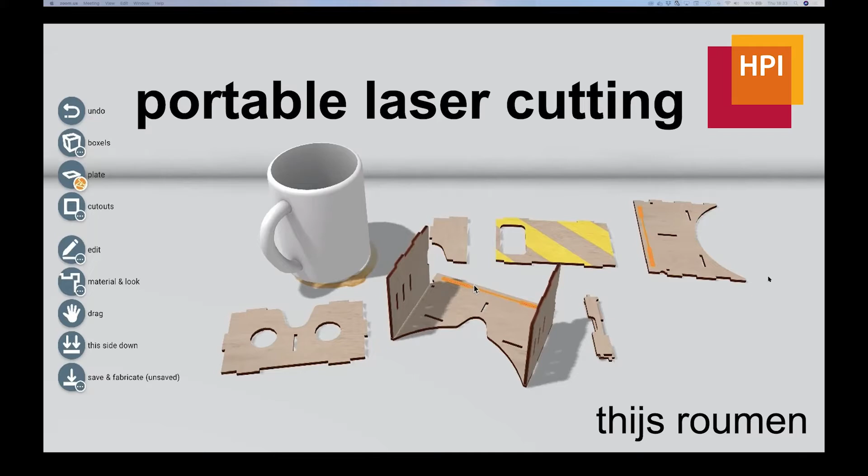So when I started to do research into laser cutting, this is roughly how it would work. You would send a 2D cutting plan to the laser cutter, and then the laser would trace those paths, cut it out, and then you would have the result of what you're trying to fabricate. In this case, that would be a microscope. There are many great things about this format. As you notice, it doesn't make any reference to the specifics of the machine. It's very easy to read. You can encode different processes with different colors. So there are many great things about this.

But today's talk, I'm going to argue why this format will have to go away, will have to die. And I'm going to make another proposal, a different way of approaching laser cutting.

So before we go into more detail on laser cutting and the specifics of that format, let's talk about the field of digital computing, which we are all much more familiar with. You've seen charts like this, where the amount of devices or the amount of users have exploded over time, and you've seen that in different dimensions related to computing. So as a researcher in digital fabrication, I try to look at these trends and see if there's anything I can take from that chart and see how that could possibly apply to digital fabrication.

One thing to note here is that with digital fabrication, we're far behind on that. We're still sort of starting to get up the ramp, and then hopefully there is some future where that exponential will kick in. But in order to get there, there are some pivotal moments that need to happen, that have happened in the history of computing and will have to happen in the future of fabrication.

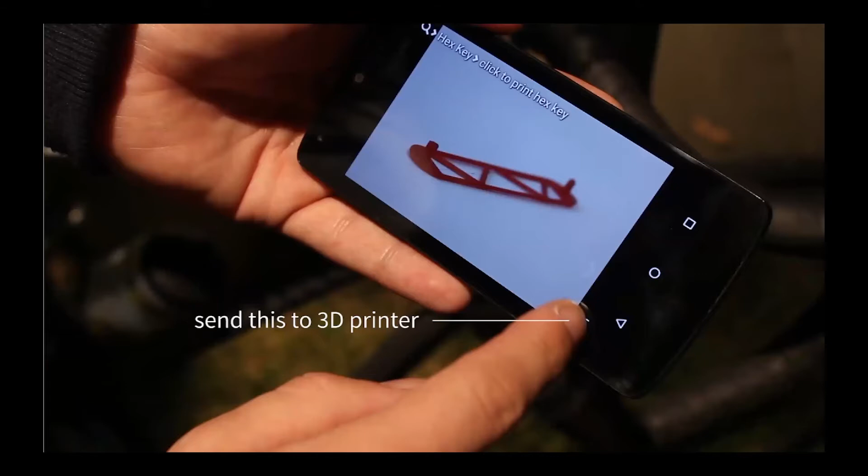So here my bike lamp is broken, and I'm sort of trying to use the kind of placeholder technology that I took with me to solve that particular problem at hand. That would be sort of the envisionment of what that future could look like if we had mobile fabrication devices with us all the time.

But that is a future, like I said, it's a transition where we went from millions of people using fabrication to billions of people using fabrication. That's not exactly where we are yet, right? That would be like four decades down the line. We are still kind of at a point where we are transitioning from thousands of users of digital fabrication to millions of users. That's another pivot that we have to make still.

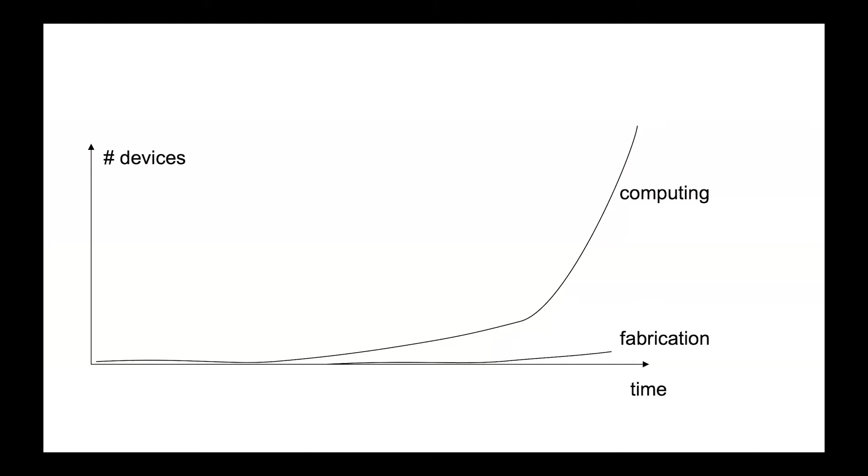And that happened in the history of computing as well. If we look back further in history, there was a pivotal moment where we transitioned from thousands to millions of users. And that is what the research of my PhD has focused on, and that's what the papers I will be presenting today will all kind of make reference to.

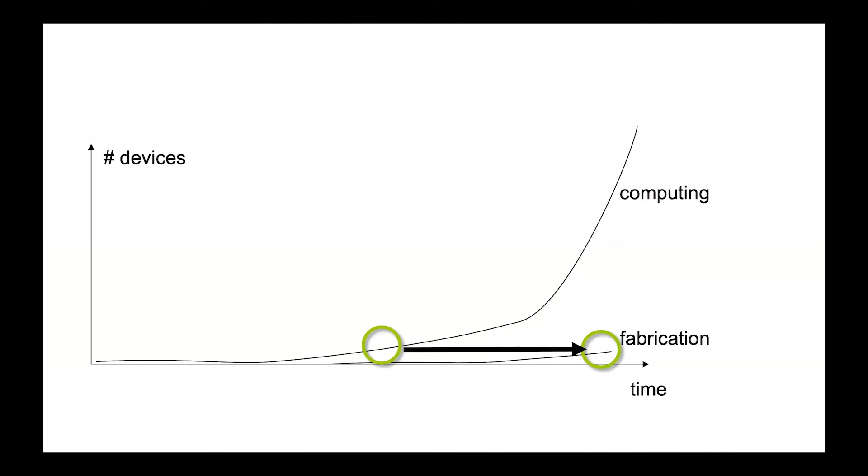So what was that moment? What was that pivotal moment in the history of computing where we went from thousands to millions of users? When I ask that question to students in introduction to programming, I get answers like object orientation or different shifts in programming languages that have happened in their lifetime somehow. But there has been an even more fundamental shift before that, which was the introduction of compilers.

So in the context of computing, we call this portability - the ability of software to be transferred from one machine or system to another. Typically you capture that in the form of a standard, which is an established norm or requirement for a repeatable technical task. So if you put that on a timeline, in the 50s we moved from hardware specific implementations to portable implementations.

And we've seen the same kind of transition happen in all different types of digital content fields. For example, in desktop publishing, the technology was around for a long time, but only since 82, when PostScript was introduced, and later Adobe introduced PDF, was the moment where portability kicked in, and therefore the content produced since that moment is still accessible right now. You've seen the same with digital video, you've seen it with digital audio. Essentially any digital technology that's been around has had this point in time where we start to abstract away from the specifics of the hardware, and then have content that remained relevant up to this moment in time.

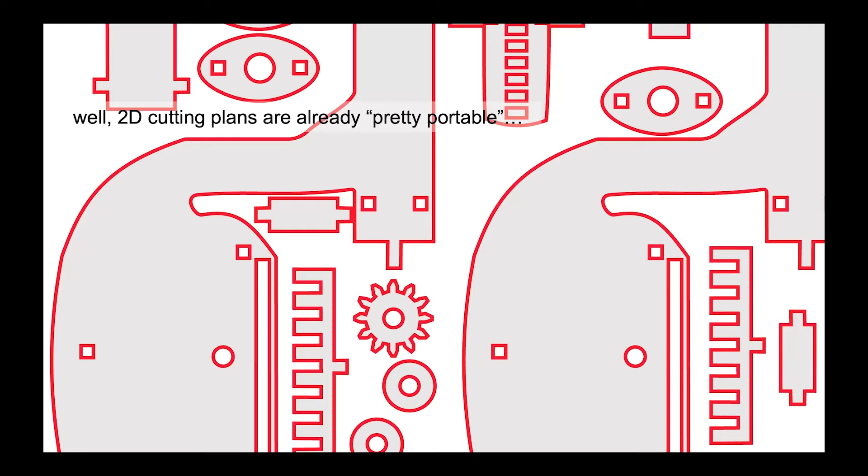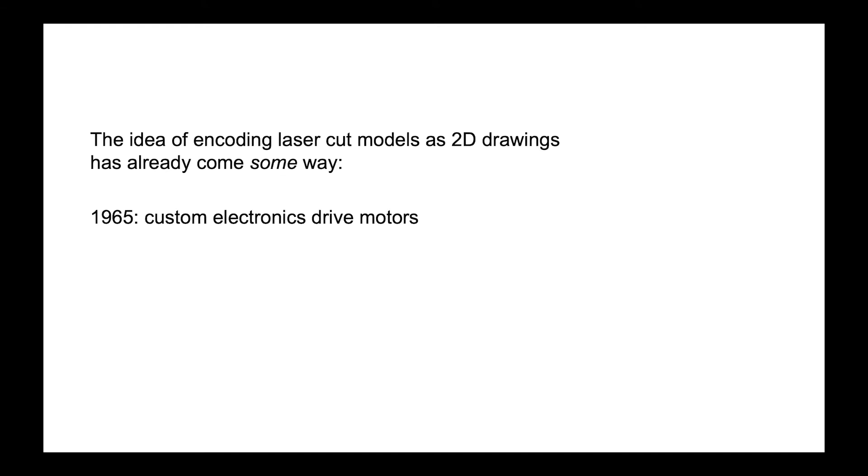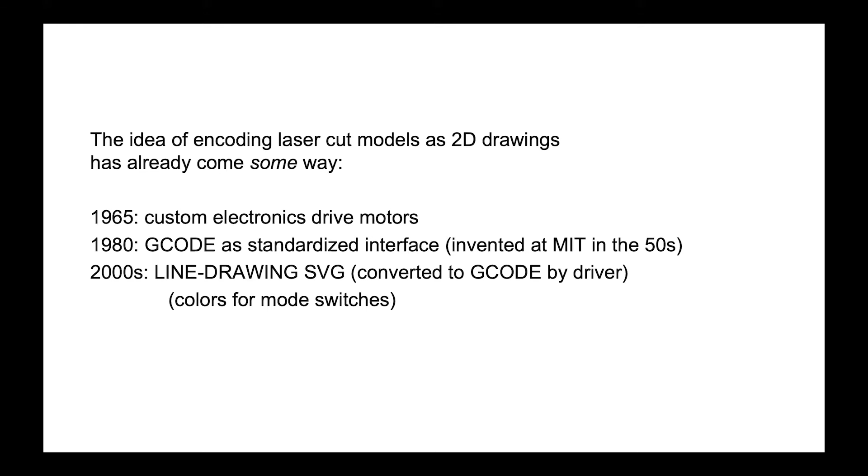So let's look at where we stand with that right now. Because I already showed you this amazing format - these vector files - and to be fair, they are actually already pretty portable if you think about it. They came a long way, because back in the 60s when laser cutting was introduced, people would have to write custom control for the motors driving their laser cutter. Then later in the 80s, the standard of G-code was adopted as an interface to connect with laser cutters - it was already invented in the 50s, but only used as the standard in laser cutting since the 80s. Later in the 2000s, we saw line drawing 2D cutting plans coming up.

So we already managed to go away from the specifics of the hardware, but there are still some fundamental problems in these 2D cutting plans. If I look at this microscope model, there are a lot of different parts that need to connect with one another. For example, this little prong here needs to fit inside this cutout when I want to assemble the model, which is all fine in principle.

But if I have a different laser cutter than the original person who manufactured this thing, it might be that my laser cutter removes more material than the original. And you see that if that happens, the prong here gets smaller and the cutout gets wider, so this thing will not fit together anymore. The same thing happens when the machine removes too little material - the prong gets too big and the cutout gets smaller, so it will probably not even fit together.

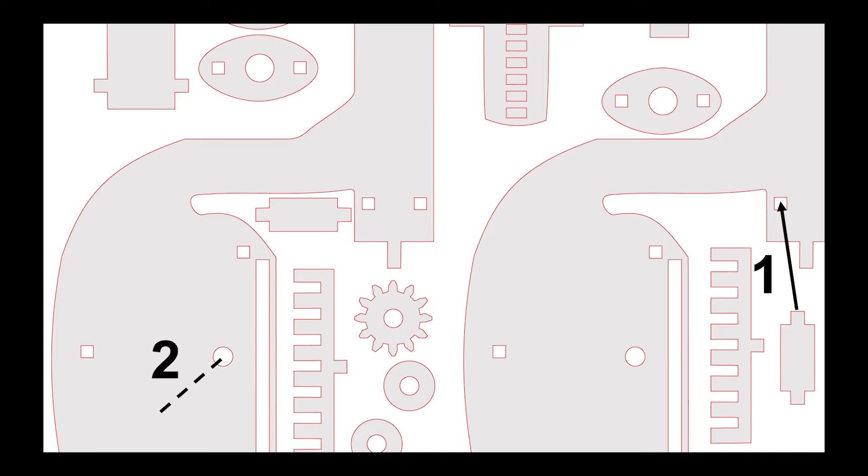And the same thing happens here, for example. Here is an axle that needs to be held in place by a bearing. Again, if the cutout gets bigger, we end up with an axle that ends up wobbling in that bearing, so it will not work. It will jam itself in place at some point.

Just thinking about these two issues would be similar to creating the PDF format for laser cutting - a format that continues to work on any machine. In this case, it would work on any laser cutter.

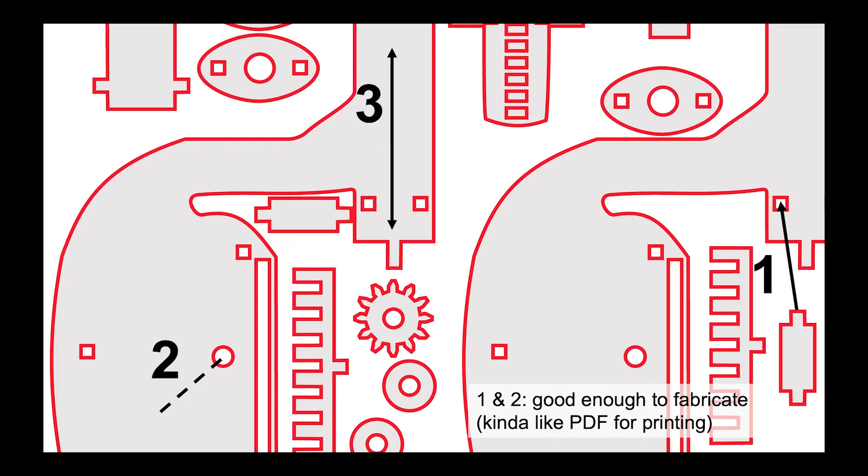But there is something even more nasty here. Like this is a microscope model, as I said before. So if I want to change the dimensions of this model, if I want to make the neck longer of the microscope, we end up with much more complicated transitions. You would have to make a lot of changes in that SVG cutting plan because it's represented in 2D to figure out how to modify that model. That would be, using the metaphor with desktop publishing, the same as having access to the actual source code, if you want to make parametric changes to the model.

So let me just start by investigating these two issues at the bottom here - establishing the PDF for laser cutting. This was my first attempt because I wanted to kind of keep these 2D cutting plans around. There's a lot of great things about them, as I already mentioned. So I was wondering if I can somehow save that format and then make it better so that it continues to work on any laser cutter.

So we wrote a semi-automatic software tool that converts a non-portable SVG file into a portable SVG file. There are two publications related to that in the last two iterations of UIST.

The way this works is it's a TypeScript application that runs in the browser, and it loads an SVG cutting plan directly into that application. Now as a user, you come in and make some modifications to the model. Right now you'll just see this quickly without understanding completely what's going on, but I will show this video again later, and then you'll have the context to figure out what is happening here. The gist is, as a user, I make some edits in that model.

I place some additional cutouts in there. And the great thing is, it's already a 2D cutting plan - it's already an SVG, so I can send it straight away to the laser cutter. There's nothing more I have to do here.

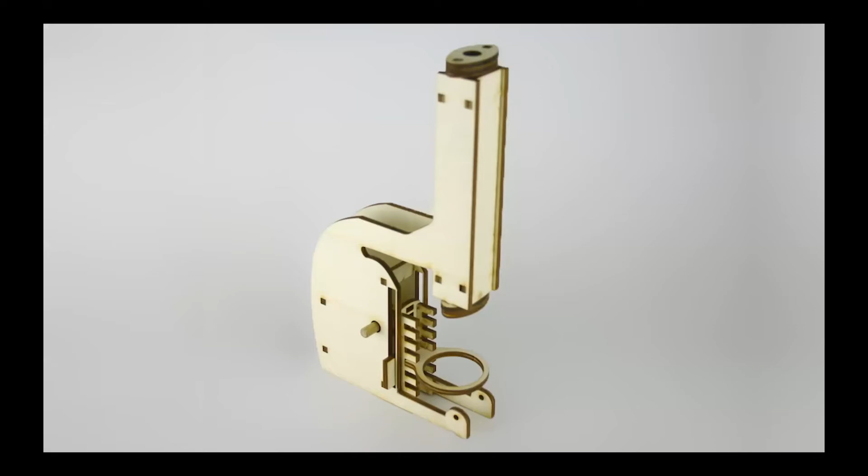So the goal is to take this microscope, which is optimized to work on one particular fabrication machine and in one particular material, and turn it into this microscope, which looks very similar if you look at it at first. But if you look in detail here, I made these joints, I changed them, I made them portable. And I modified this mechanism here - I also made that portable.

So let's look at the joints first. This is what the joint on the side plate of the microscope looks like when we zoom in all the way to that cutout. And you see indeed that the gray zone here is the amount of material that could be removed if your laser cutter removes more material than another one.

These joints that are press fit together really rely on a very high degree of stiffness. So minor changes in kerf make this fail, they make this thing not work out.

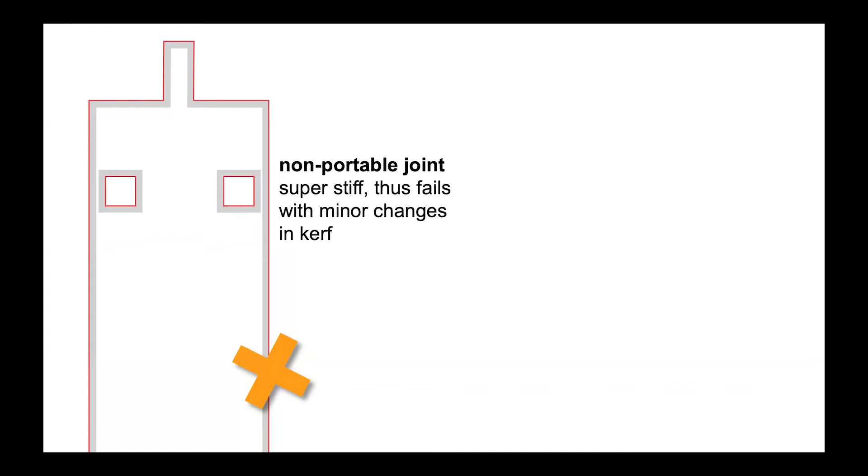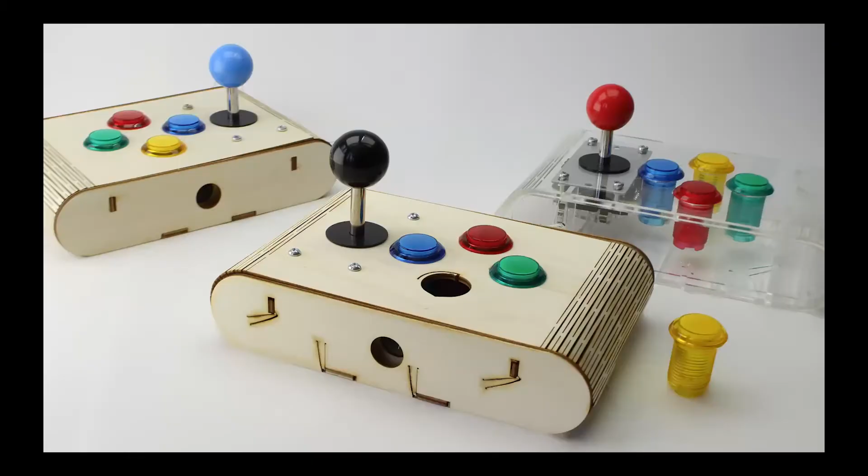So what we do instead is take that joint cutout and add this cantilever spring right next to it. The great thing is now, rather than relying on compression of the material, we rely on bending of the material. So there's a larger tolerance for which this joint continues to work.

We use that approach to convert all the joints and mounts in the different models into kerf-independent joints and mounts. Here you see some finger joints, and also the hole that has to hold this button in place. They're all turned into cantilever-based versions of the same mechanisms. The same model now continues to work not only in plywood, but also, for example, here in acrylic.

So we call this software tool SpringFit. It's a software tool that detects joints and mounts in models and replaces them with portable equivalents that are tolerant to variations in kerf. But it's not quite the complete story.

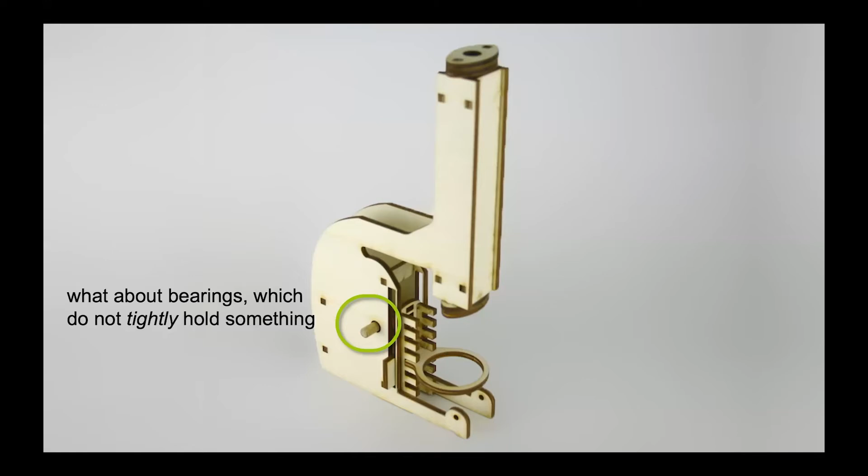Remember, I showed you this microscope, and there was also this mechanism there, this bearing. The thing with the bearing is that you want to hold that axle in place, but you don't really want to put a spring right next to that, because if you were to do that, you would introduce friction into the mechanism, which is the opposite of why you want to use a bearing in the first place.

So I was wondering if I can again save the day by modifying that bearing in a way so that it continues to work even if the kerf or the material changes. We achieved that by placing this additional inset right next to the bearing. Zooming into that, it's some sort of crescent-shaped inset that we just jam next to the axle. And that actually turns out to work and continues to hold that bearing in place even if the kerf changes.

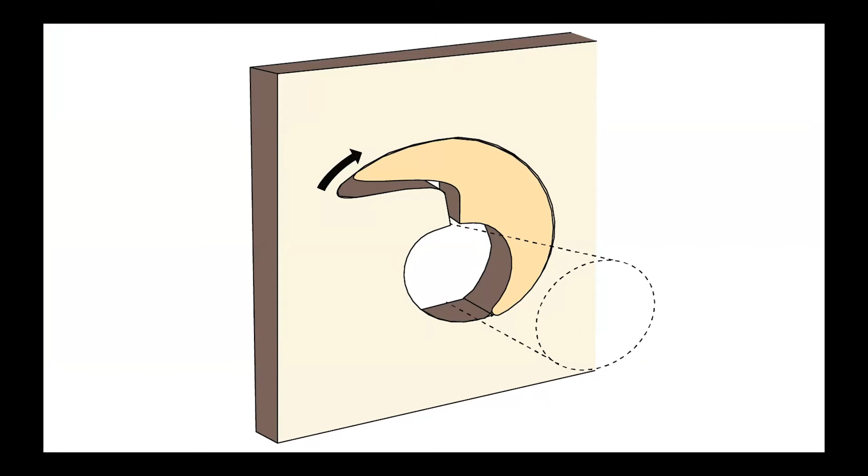Let's see how that works. Here is the bearing which has to hold the axle in place. As I increase the amount of kerf in the mechanism, you see that the inset changes in shape a little bit, but we constantly jam it further in. If you've paid attention, you see that at all times the inset closes the gap exactly.

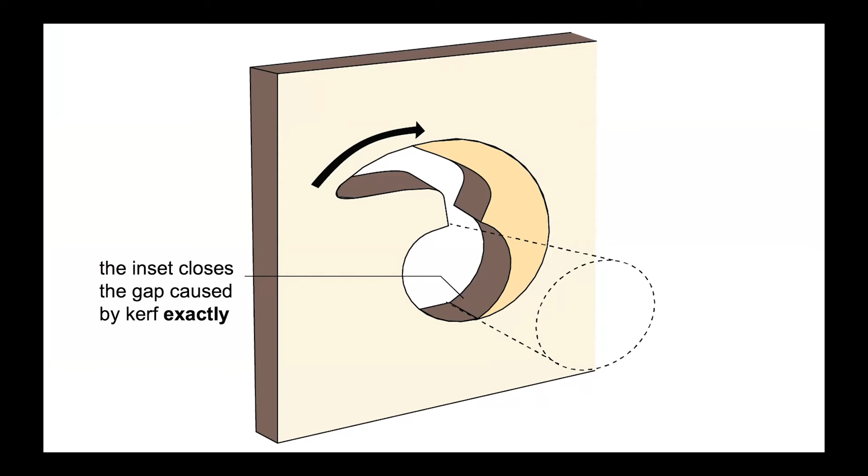So the gap that is caused by kerf is always closed, and the bearing is always holding that axle in place. All the user needed to do here is just jam the inset in place. It doesn't need to understand how kerf works or how materials work or any of those. You just take the inset, you jam it in the cutout, and then you're good to go.

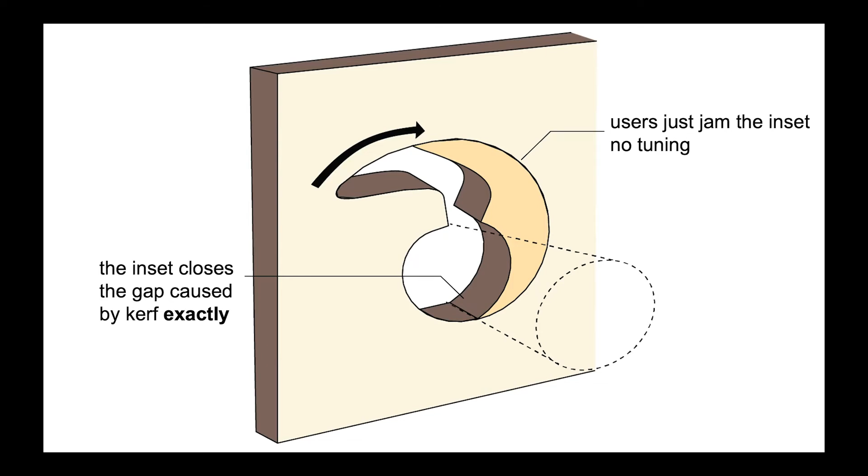Let's look from a more technical perspective at what's going on here. The inset consists of two key elements: the outside curvature, which we refer to as a jammer, and the inside curvature, which we refer to as an inverse scaler. If you look at the jammer in isolation, it has the shape of a self-similar Nautilus spiral.

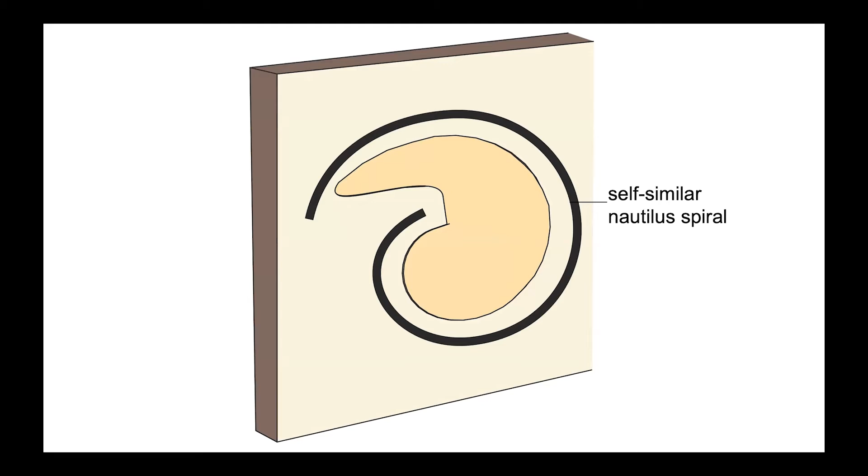The great thing about this geometry is that if we apply kerf to that inset, it gets smaller, which makes sense, but the curvature doesn't change on the outside. So there's also always going to be a moment, if we rotate it in place, where it's going to jam inside its own cutout, and then it holds itself in place really well.

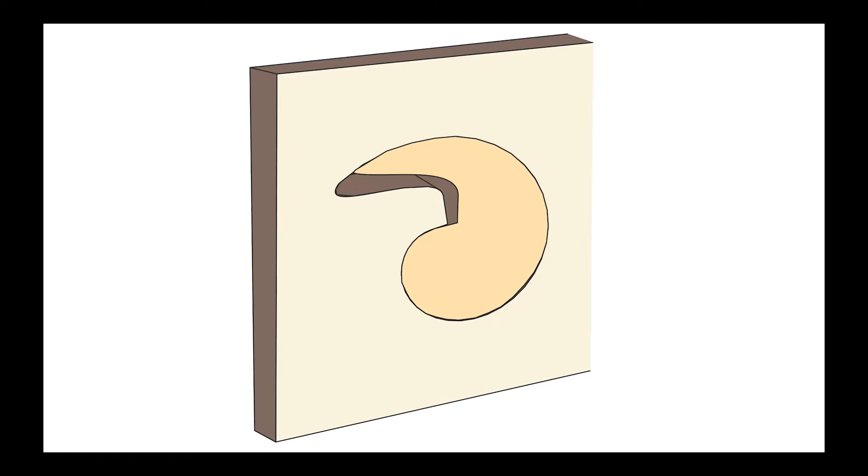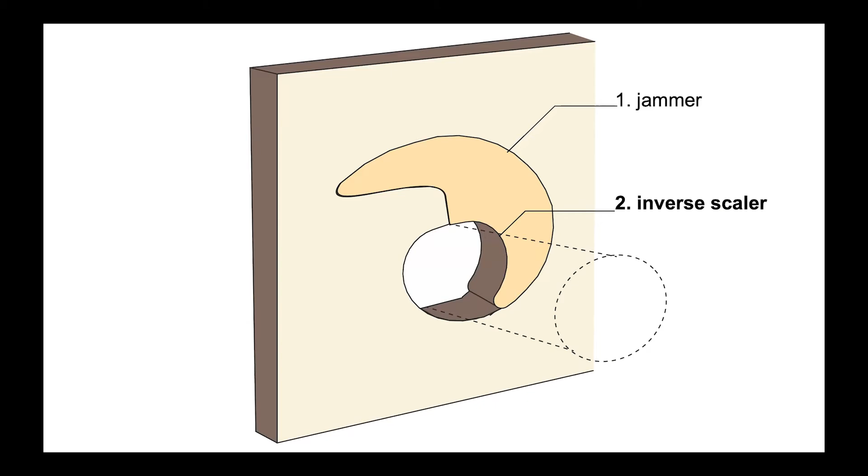So the jammer holds that inset in place, and in turn the inverse scaler now has to hold the axle in place. The way this works is again based on the same philosophy. The inverse scaler is derived from a similar spiral, but now it's flipped. So as more kerf results in more rotation of the inset, the cutout gets actually smaller by exactly the same amount, it gets compensated for again.

And that results in bearings that are of constant size. If you look here, we've simulated the amount of kerf in different bearings, and you see that even though the kerf goes up, the bearing is constantly holding the axle reliably in place, even if you would mill the same cutout.

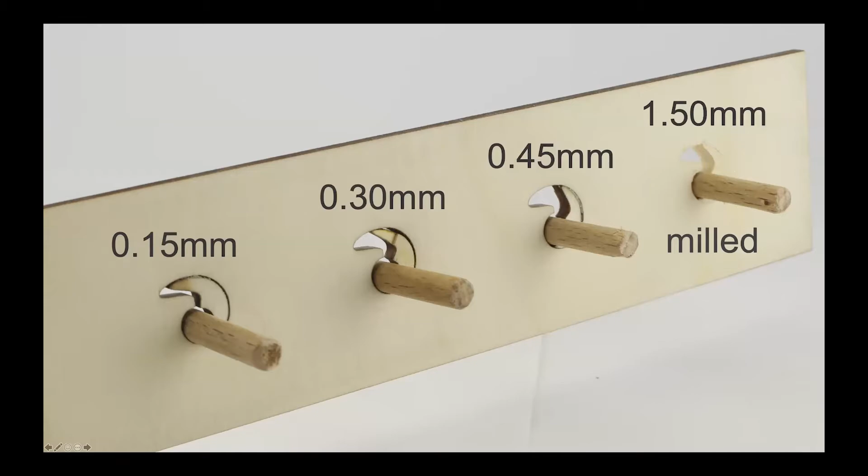So for that reason, we call these mechanisms kerf canceling mechanisms. They are mechanisms that continue to perform their functionality independent of the amount of material that's removed by the fabrication machine, which is known as kerf.

So if we now look back at the initial walkthrough of the editor, you have some sense of what's going on. We loaded that microscope cutting plan here. Ahead of time, KerfCanceler tried to guess what possible mechanisms are in there, but it cannot get everything right. For example, there is a sliding mechanism here, and in the 2D cutting plan, that's represented by a simple rectangle, so there's no way for KerfCanceler to know that this thing has to be a sliding mechanism.

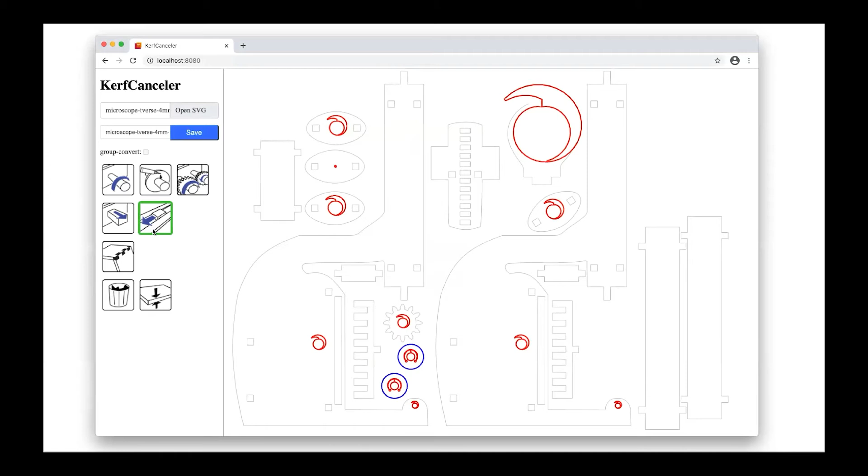So this is where the user comes in and annotates these cutting plans with additional information. Here we place a sliding mechanism on top of that rectangular cutout that we found. We tell it where the gears are, because again, the gears are not encoded in the 2D cutting plan.

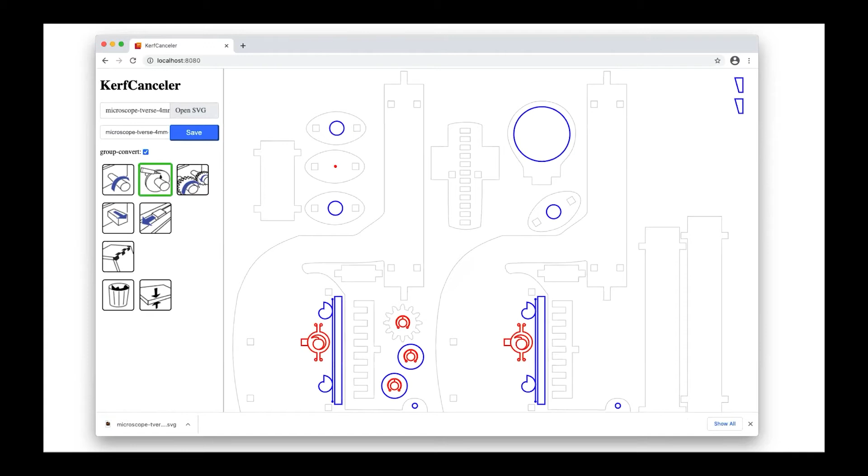And then when everything is done, you just save the file, and as I said before, you send it to the laser cutter right away. You can now send it to any laser cutter. So this microscope continues to work irrespective of variations of kerf or material, even if you would fabricate it on, for example, a milling machine, so another subtractive fabrication technology.

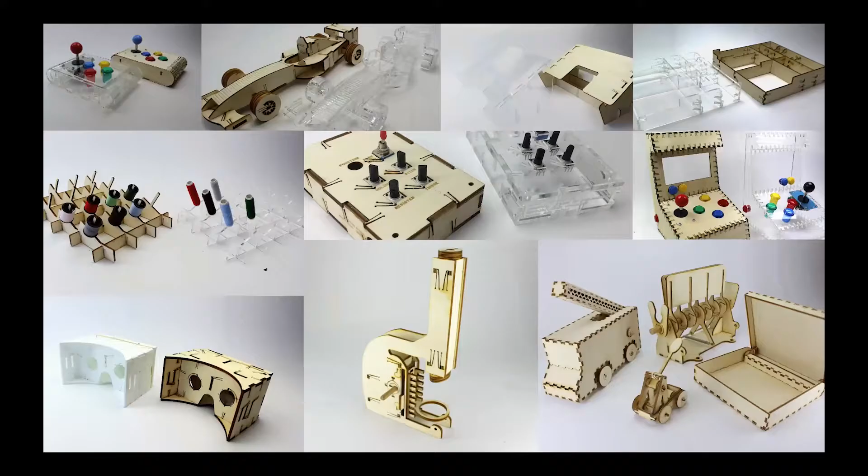And so we use that software to convert a whole range of objects that we found in online repositories to kerf-independent things, and we now fabricate on any laser cutter and in a range of materials.

All right, so how far did we get so far? Like I promised you portability, and I think with the approach that I've shown you so far, we've essentially achieved portability, because these models will fabricate on any laser cutter. They work on a range of materials. In many ways, this is the same as a PDF, which you can just open on any device and it reliably works.

But I don't know about you, but if I look at some of these models, we did something that came at a cost, it didn't come for free. The cost here is that if you have a lot of joints, like for example these finger joints that are lined up with each other, it has some sort of aesthetic quality to it. You may or may not like it, but it certainly also has a structural quality to it, right? It decreases the structural integrity of the overall model.

And that is fine for most laser cut models, because they tend to be very, very sturdy in the first place. They are excessively sturdy because the material is just very rigid by itself. But it's a trade-off that you need to make. If you really want to optimize your model, this may not be the best way of solving it.

But more importantly, I made a bigger promise at the beginning, right? I said I want to be able to modify that microscope. So if you look at the microscope again, the 2D cutting plan here, if I want to change the length of this neck, that actually got even harder because I added additional cutouts in the cutting plan now. So let's see if there's a different approach, a different route without necessarily saving the 2D cutting plans. There's another way of solving this problem.

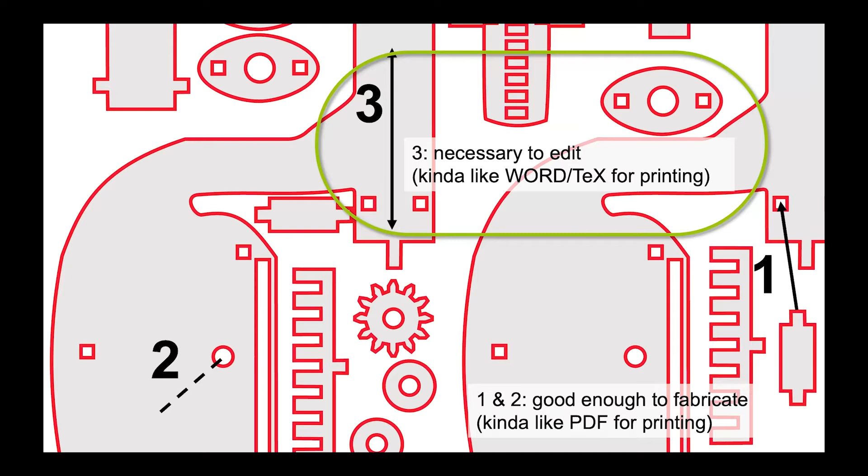So in 3D, this would be a different problem. Here's an example of a VR headset. I don't know if you've seen Google Cardboard or other kinds of VR headsets lately - you put your phone in the front and you look through a bunch of lenses, and that gives you a reasonable VR experience because there's a divider between your eyes, so your left eye gets different content from the right eye, displayed on your phone. It's a very cheap way to very quickly have a reasonable VR experience. But the model that you see here is not a particularly inclusive model if you think about it.

It's like if I talk about millions of people using fabrication, this model is made for one particular user, right? It's one specific shape of your forehead, one interocular distance between your eyes, and one prescription, for example. I would probably want to modify that model in order to make it work for me.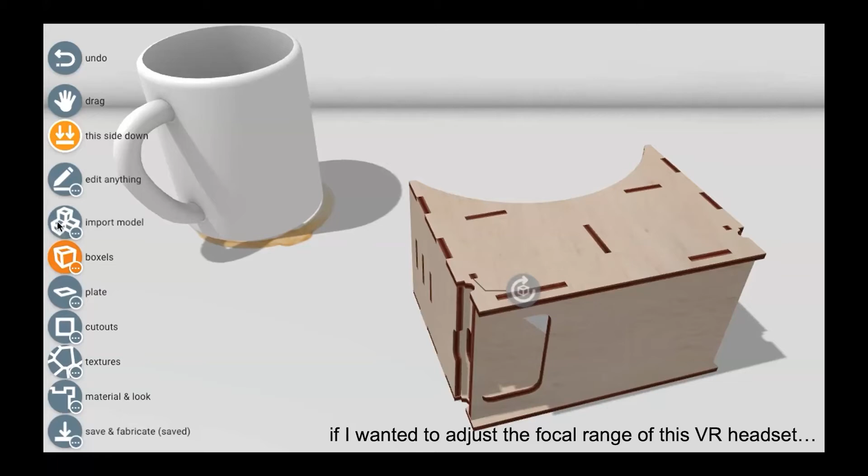What I would want to do is stretch the front of that VR headset further away so that it will fit my prescription. And in 3D, you would do it like this: you would take a stretching tool, take the model, and just stretch the front plate forwards. Now I could adjust it to my prescription, and I'd be able to fabricate it and have a meaningful model.

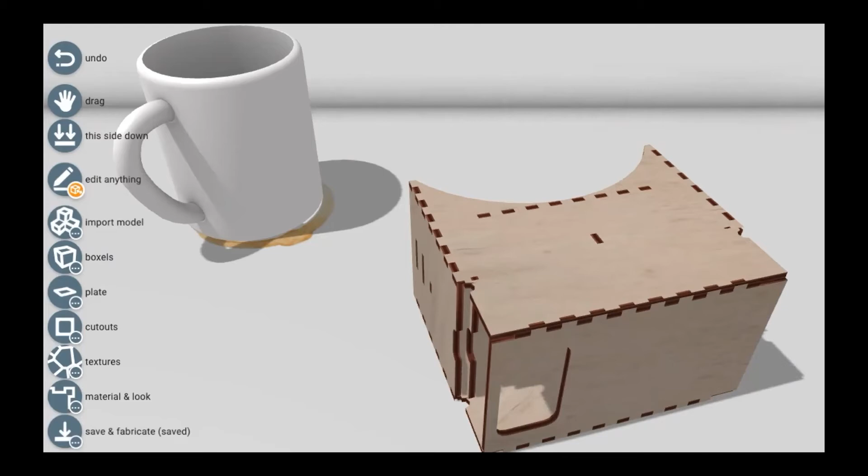But this is not how I find that model in the first place. If I go to an online repository, this is what I end up finding: a 2D cutting plan, as we've been discussing so far. And so it works a little different here.

If I want to make that same transition, if I want to again stretch that front plate forwards of the VR headset, I would logically modify that plate that sits on top of the VR headset. But when I modify this, I'll have to make sure that all the plates that connect to it are also modified accordingly. So I'd have to modify this side plate here too, because otherwise you'd skew the model instead of stretching it straight forwards.

And I'm going to need your help here. I don't know if you can use a virtual hand or a checkbox or something to indicate what I need to change in order to solve this problem. So I would like you to vote if you think these have to change. Would these parts in the model have to change? Just raise your hand or virtual hand if you think so.

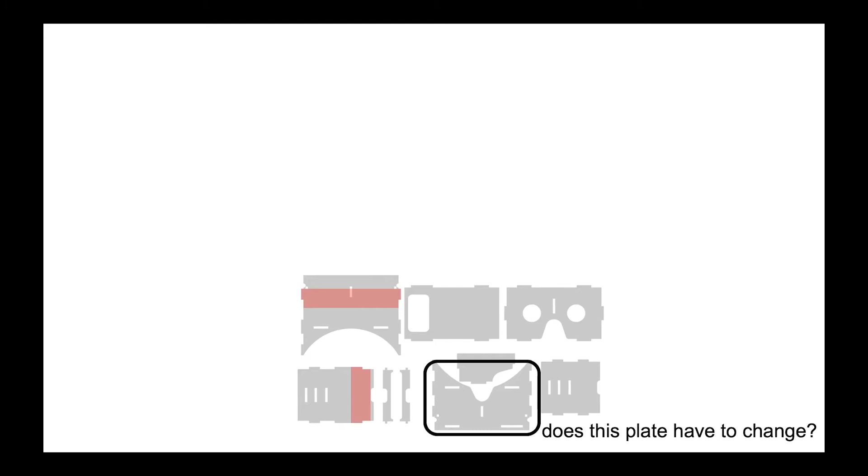What about this plate here? Would that have to change? Maybe - I think I would change this plate because this is sort of the opposite of that top plate, the plate on the bottom. So if I stretch only the top plate, I would skew the model forwards. By stretching both at the same time, I would actually be able to go straight.

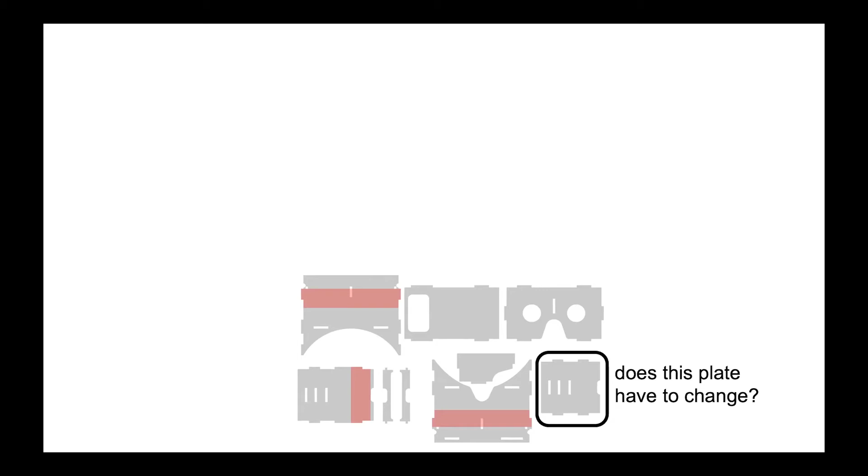What about this plate here? I think that has to change. I think so too - if you didn't modify this plate, you'd sort of warp the model instead of stretching it forward. So you want to make the same transition here too, stretch it longer.

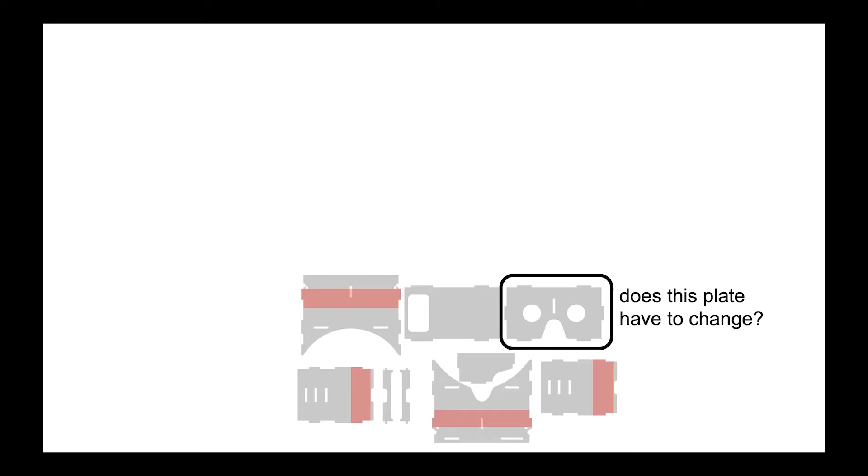This plate - how about this one here? So I would agree, I would also not modify this one. This one actually turned out to be very interesting. We had expected that we would not have to change it because it doesn't connect to the other plates that I've been stretching here.

But it turns out that it's the divider between your eyes. If you don't make that longer at that point, the left eye will see the content of the right eye and the other way around. So for the optimal VR experience, you actually want to modify this one too. But the main gist is that in order to find out what you need to change, there turns out to be some ambiguity - some discussion already, even within our lab, we had discussion about this.

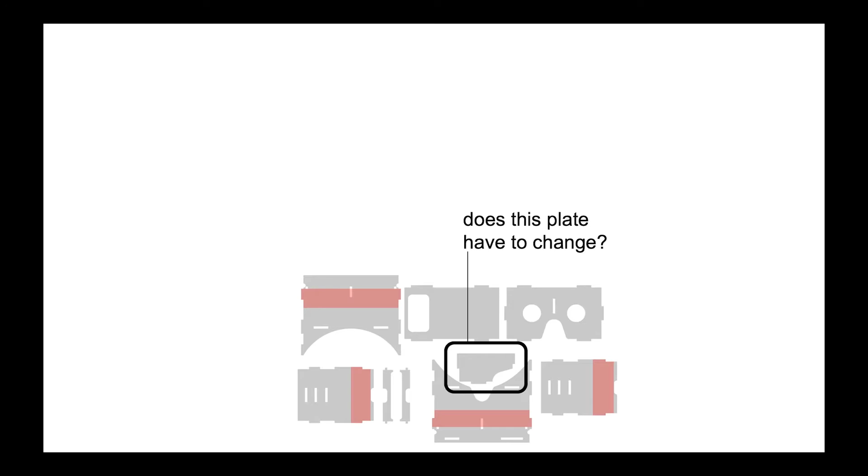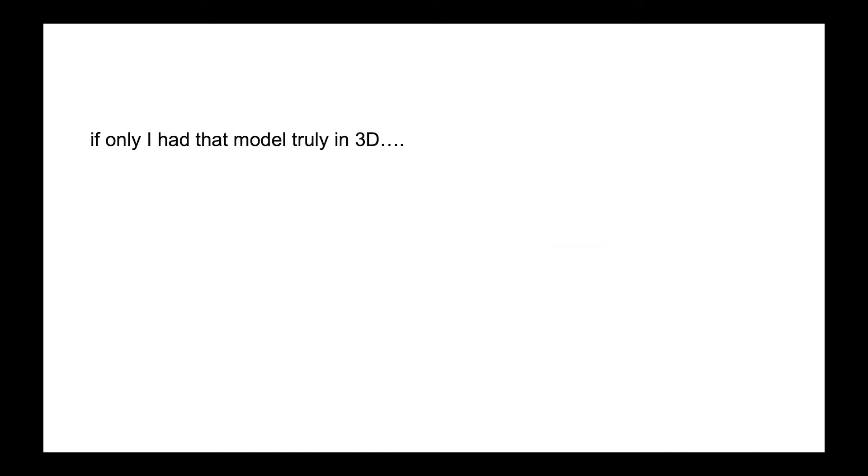The main thing is, in order to come to this conclusion, what you end up doing, I think, is you imagine what the 3D model looks like of these plates, what the transition looks like in 3D, and then you execute that back to the 2D cutting plan to figure out which plates to modify. So I can't help but wonder what it would be like if we truly had this model in 3D in the first place. While I was doing the research I presented so far, at the lab we started a bigger project called kyub, where we build a 3D modeling environment for laser cutting.

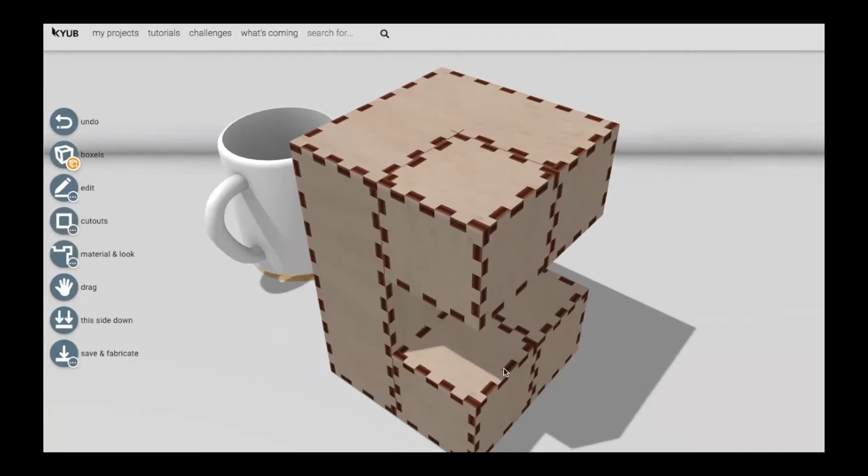So here's a bit of a preview of how that works. I'm trying to model an espresso machine here for laser cutting, and this is what the kyub editor allows me to do. Very quickly, it lets me stack together a bunch of boxes and build the shape of that espresso machine. Then with additional tools, I can fine tune that geometry and get away from the boxy structure, making it something more interesting, closer to what an espresso machine would really look like.

And of course, we want to put a logo on it because we can. And there you go, right? So in like a couple of minutes, I mean, this was sped up, but still in less than 5 minutes, you would be able to model a complete espresso machine and then fabricate it.

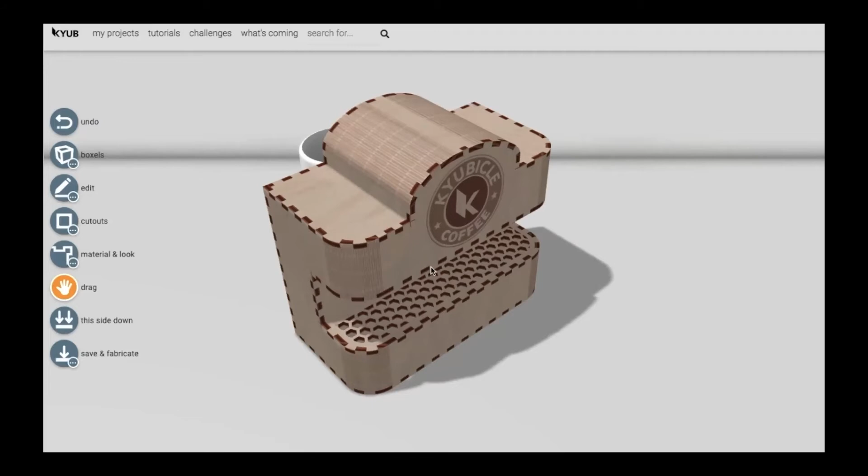And from a portability perspective, this is great in terms of UI, but what's really nice here is that you would now also be able to export it for your particular laser cutter. So you don't need to worry that it works on any laser cutter, you just make sure it works very well for yours, because that's the one you end up fabricating on. You do that by defining the kerf, controlling the parameters that vary when you change the laser cutter.

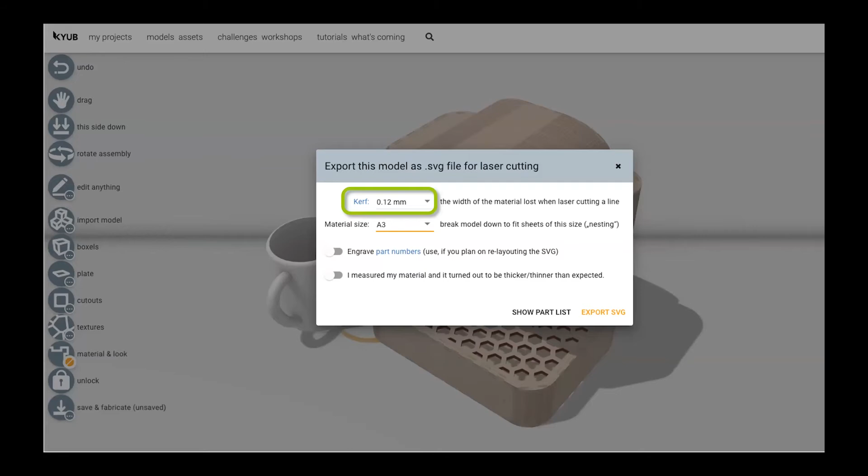And you would then end up with the plates that are exported. In many cases, for most users, you may not know what the kerf of your laser cutter is. You'd be able to indicate that, and then get a kerf strip to measure it with a test cut yourself.

So we have about 500 beta users of kyub, and a large repository of things people have been building. The great thing is all these models are now usable. They are inherently parametric, they can be fabricated on any laser cutter, and you can easily make any modification to it if you want to. And everything is shared, so you can completely start building on the work of others.

So with kyub, in many ways we're done here, right? I've solved both problems here, the issue of not being able to fabricate on a different laser cutter, and the ability to modify the model in the first place.

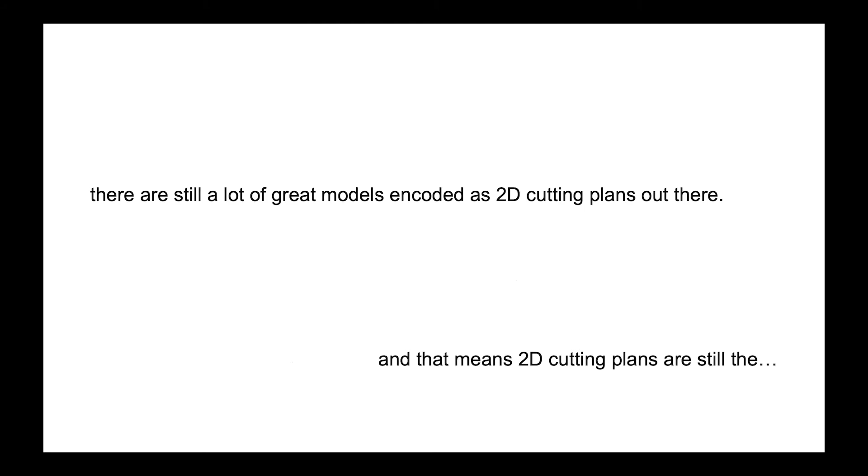But there is a bit of an itch here. There are a lot of great models out there, a lot of engineering knowledge that went into all the models being shared up to now. And that goes for the online sharing community, but even more so for entire companies that built their expertise making these really beautiful 2D cutting plans with a lot of valuable engineering knowledge in there. As long as these 2D cutting plans are around, and people have invested entire careers into making these things work, I think they will remain the standard.

There's just nothing I can do, as a researcher, I can cheer that we all need to start modeling in 3D, but in order to really make a difference, I need to do something more here, I think. Because the problem with standards is, well, they tend to stick.

I don't know if any of you play guitar, but by the time I was born, this is how people shared guitar tabs, an ASCII format. It has all the information in place that you need in principle to be able to play this riff here. But this is something I downloaded just a few months ago, so nothing has changed. It just worked well enough that it continues to stay around, even though there are better ways of doing this. We could come up with way better ways of encoding these guitar riffs if we wanted to. It just doesn't change because it seems to work reasonably well.

And I'm afraid that if that is the case for 2D cutting plans as well, instead of making this transformation to the VR headset, we will just end up doing this: we will still have to imagine what the 3D model looks like, envisioning what the changes in 3D are, and then executing that back to the 2D cutting plan.

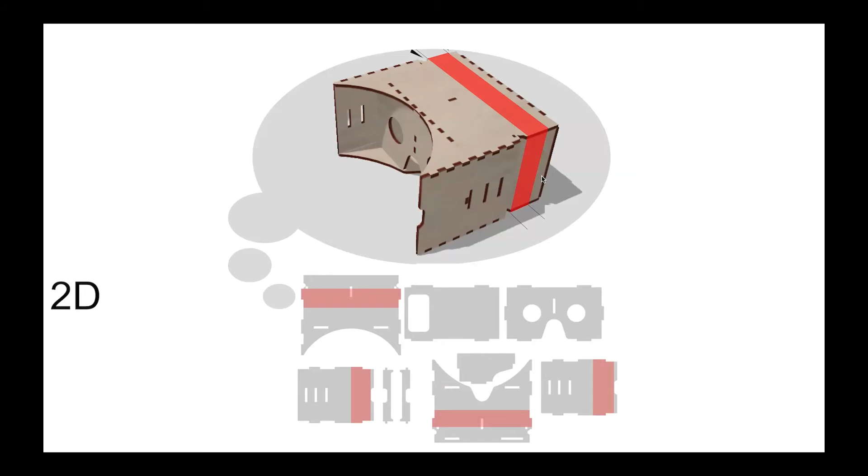So we ran a user study to find out how complicated that really is. It turned out that on average, it took participants 24 minutes to change that VR headset we just looked at together. And 11 out of 13 models failed when we tried to fabricate them, because joints didn't line up, parts didn't connect together well. So not great - it's not something you want everybody to start doing, especially if we talk about millions of users here.

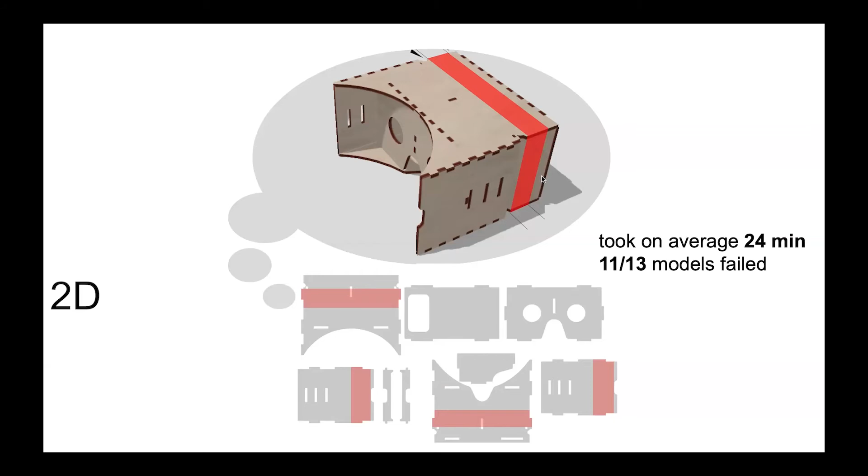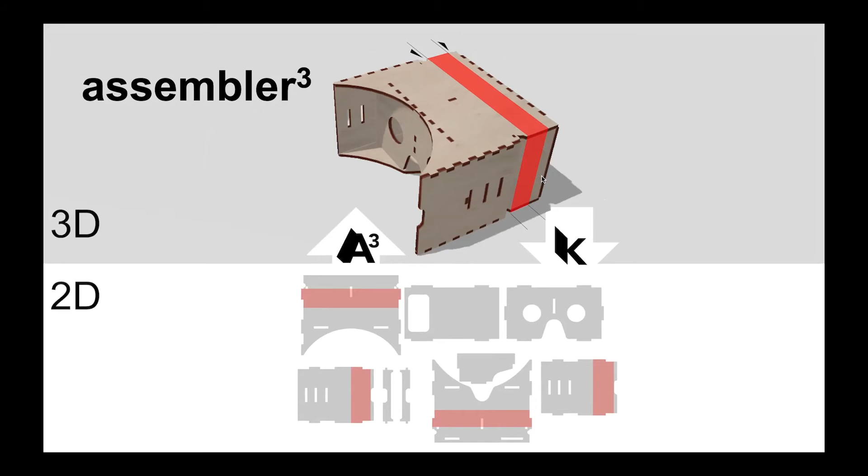So we thought, well, if that's something we have to do, if you have to envision what the 3D model looks like, why don't we make it easy to do that? Why don't we write software that allows you to make that workaround easier somehow? And this is where assembler cubed comes in. There already is software that allows you to go from 3D to 2D, that's kyub, what I showed before. But there's nothing that allows you to go from these 2D cutting plans up to a 3D model. That's where assembler cubed comes in. And even though this feels like an additional workaround, it turns out that this workflow is 10 times faster than a traditional workflow, and all models continue to work as a result.

So let's look at what is going on here, what that trick is to go from 2D to 3D. Here's a bit of a preview video of how you load essentially the 2D cutting plan into that editor, the 3D editor we looked at before. It then allows you to sort of click together the model, puzzling together this VR headset in the 3D modeling environment. So that's an algorithm which we call assembler cubed. It's a 5-step algorithm that converts 2D laser cutting formats into 3D models. Let's look at what these steps are.

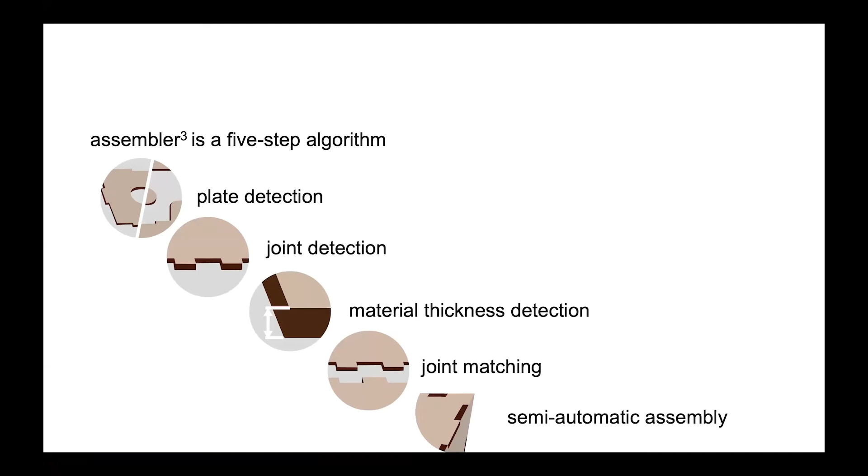So we take a 2D cutting plan, and first we try to detect the individual plates in that model. Then we detect the joints on those plates. We use that information to derive the material thickness of the individual plates. And we then try to pair up the different joints with each other, to figure out what joints could possibly match with each other. In the last step, users semi-automatically assemble the model. In the interest of time, I'm going to focus on the last two steps of that algorithm - those are the juicy bits, the more interesting parts of what's going on here.

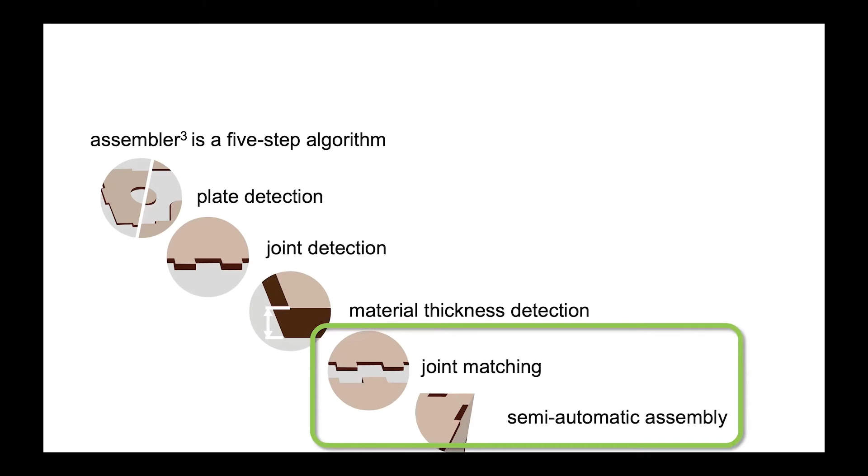So we've already figured out what the plates in the model are, and we've already identified the joints and the material thickness of this model. Now we're left with this VR headset we're looking at here, and we need to figure out what joints could possibly match up with each other. I'm going to use your help here again to figure that out, because this is something you all will kind of do fantastic at, I think. So we have this plate here, and you've all kind of seen the 3D model before. Now let's see what that would connect to.

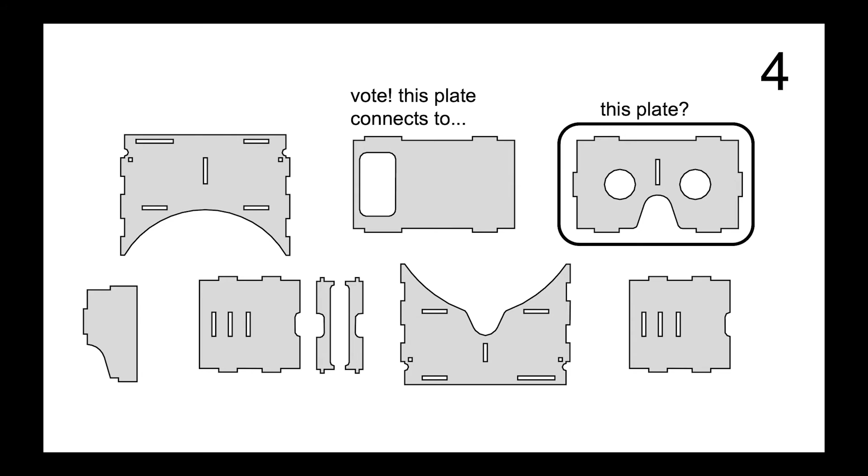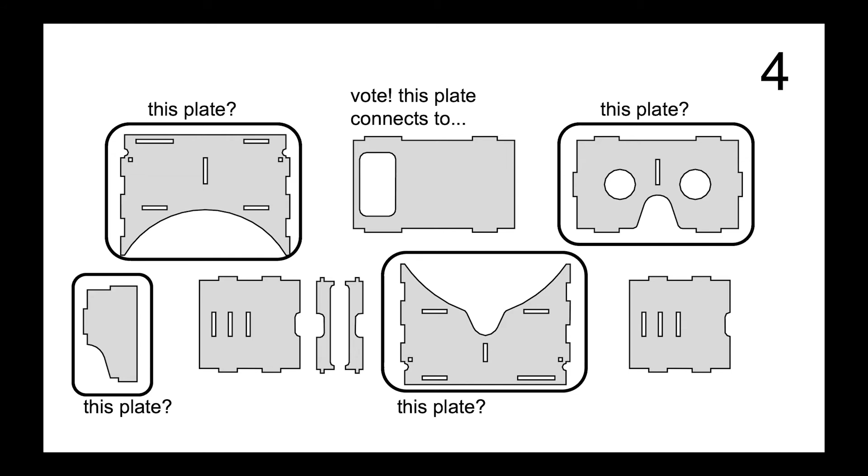So as you were trying to figure out what joints pair up with each other, what you've probably been doing is looking at the shape of the joint here and imagining a 3D model in your head, right? You look at the shape of the joint and try to figure out where could this possibly fit into. It's sort of clear that it doesn't fit with this joint here, for example - it's clearly different, and you can all tell just by staring at this model. But for an algorithm to make that decision, it will have to compare every joint to every other joint, which at best would result in quadratic complexity, but probably even worse because there are differences within the model of different types of joints as well. So we try to get that intuition of - okay, this joint clearly doesn't fit with this joint here - and we try to encapsulate that intuition in the software to make this tractable.

And the way we did that is by storing all the joints in a table and then using a lookup, using a key to find which joint could belong to which other joint, which is known as a hash data structure. So the way you would hash these joints is you'd try to get their functional shape in that hash, and then find out what it would pair up with.

So let's look at this joint to figure out how to do that. Our first intuition was to just take the size of the fingers here and say, well, if there's something that matches that size of the fingers, we'll probably have a great match. But it turns out that this finger here mates with something that is slightly smaller somewhere else in the model.

Because again, like kerf, right? People have compensated their model so that the finger does not need to fit to exactly the same size, because the material that's removed by the laser cutter would make this model fail.

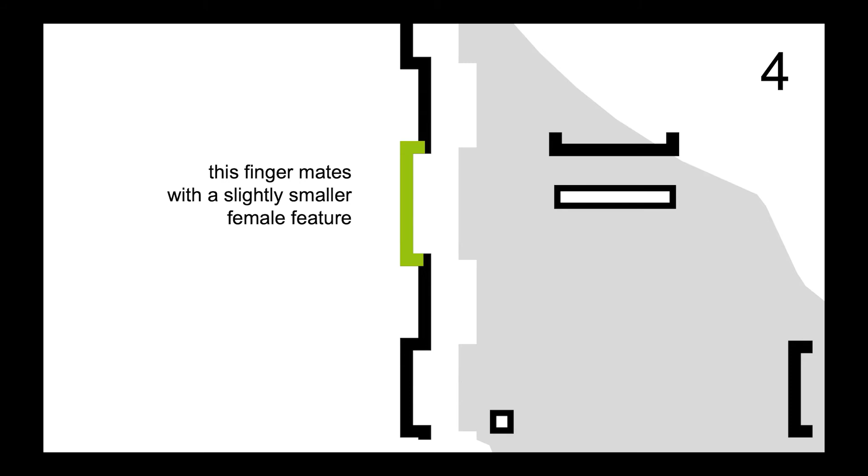It's pretty messed up. But the good news is that right next to this finger, there's a cutout. And that cutout is compensated by exactly the same amount, right? Where the finger is made bigger, the cutout is made smaller in order to compensate for kerf. So if you take the sum of these two, you actually have a metric that is independent of variations in kerf, and that will allow you to find matching joints somewhere else in the model.

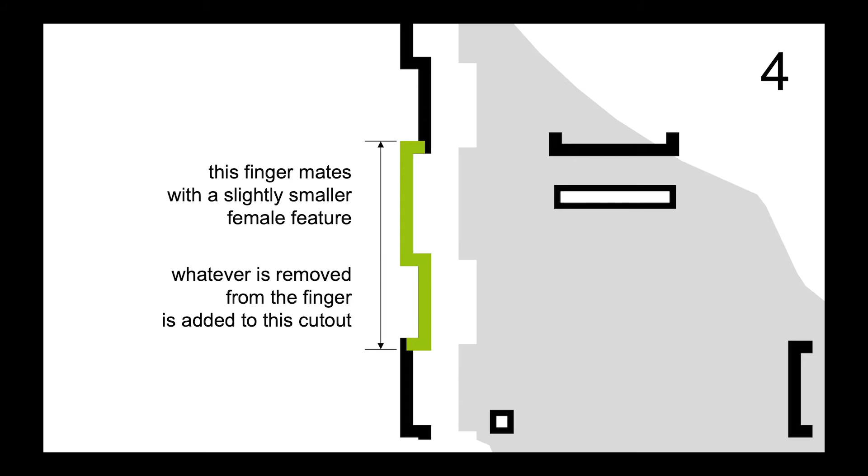Now it's still six alternatives, which is not ideal, right? You'd sort of hope that now there was one candidate and then we'd be done, because then you just know that these two plates fit together. So in order to do that last step of disambiguation, we bring in the user actually.

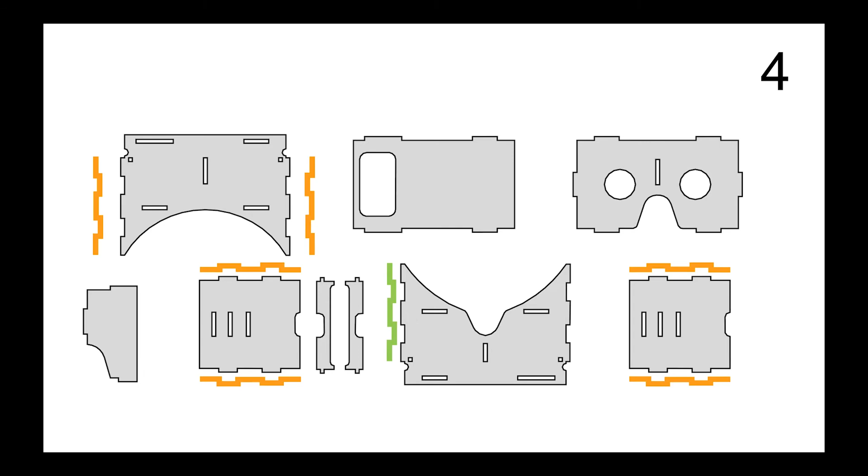So this is what you've seen before, right? You load the 2D cutting plan into the editor. And a user now starts to essentially puzzle it together. And you see every time I click one of these plates, it highlights all the possible joint candidates. So it gives some sort of sense of what I could possibly do with every plate.

And sometimes the orientation is wrong for a plate. Then you have this rotate icon that sits right next to the plate, which you can click to override the suggestion of the system. But in this case, it was actually right in the first place, so we just undo that and continue to assemble the model.

And you see that most of the time there's only one or two alternatives for every joint that you would pair up with. So it's reasonably tractable for a user to puzzle together the VR headset here.

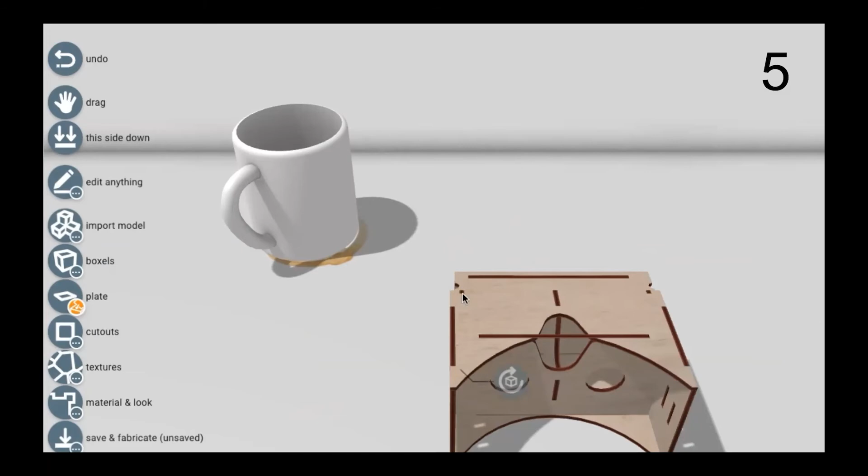And the nice thing is that we are in a 3D modeling environment all along, so I can now make that change to the prescription that I wanted to make to the VR headset using just a different tool in the same modeling environment. So I just use the stretch tool here and then modify that VR headset.

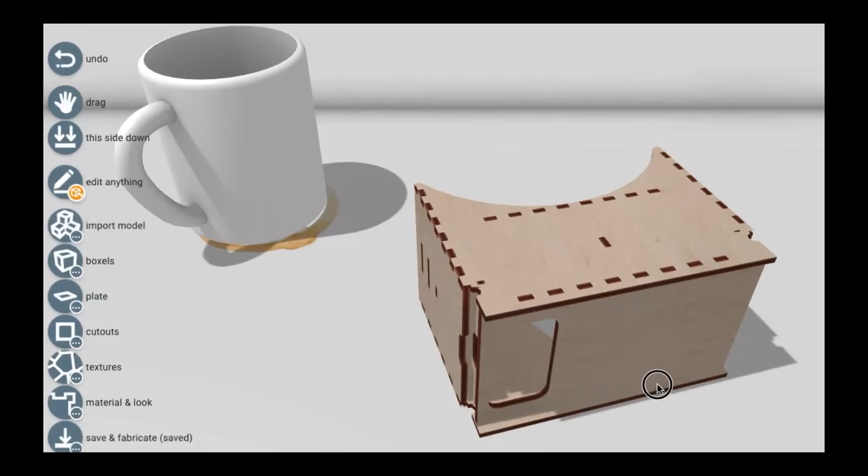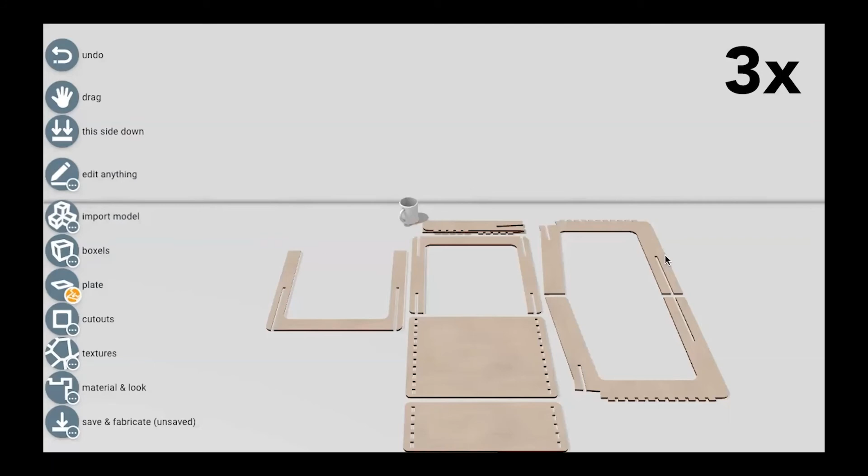And so we use that algorithm and that approach to take 100 models that we found in online repositories and turn them into 3D models. So it's just sort of nice to watch. Here's a chair being assembled.

Some candle holder. Birdhouse. You see that every now and then the algorithm still gets it wrong, right?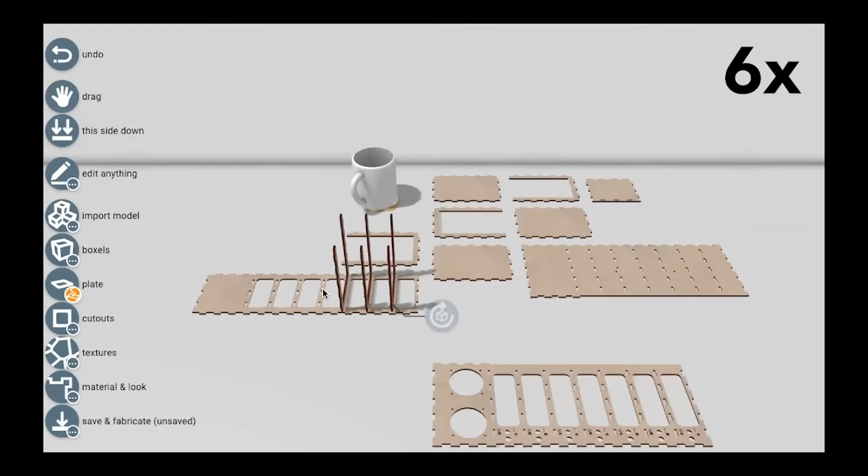So the orientation of a plate is off or something, but then it's just one or two clicks of that rotate icon to typically get the plates in the right orientation. Here's the microscope we looked at earlier. A Raspberry Pi rack, because that's what makers tend to make to mine their Bitcoins. A test tube rack. And of course, we could also not resist the urge to reconstruct a dinosaur.

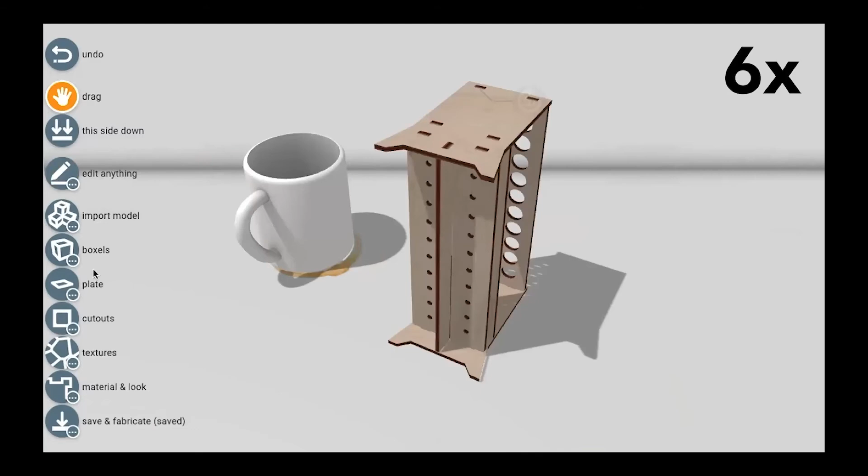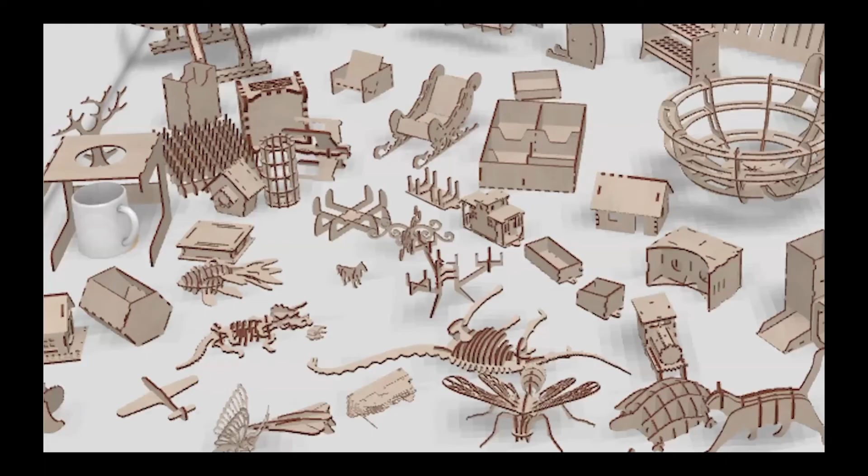And 100 other models that we found in online repositories. And the great thing is that all of these models now exist in a 3D format. So they are all inherently capable of parametric modifications, and they will fabricate on any laser cutter, unlike the format in which they were shared before.

So here's a bit of a preview of what is coming up next from my side. The last step, if you really want to make this transition truly accessible to everyone, is to remove one more hurdle of complexity for the user. That is, you can sort of puzzle together the VR headset if you know how it works, right? And you saw, as we were trying to do this together, you may or may not have succeeded at figuring out exactly how all the parts work.

So it requires some knowledge of how laser cutting works and how joints work and all that. And we want to drop that, because that still limits the accessibility of laser cutting to only those people with that knowledge. So in the last step, we are trying to push this further by automating that entire workflow.

And the way we do this now is we just have the same dialogue again, right? You import the VR headset in this case. And in the background now, the algorithm starts to beam search the alternatives and figure out the exponential space of different ways in which you can connect the plates, to then immediately have a VR headset in the editor, which you can now modify. And that's, of course, what you might want as a user if you're not interested in the fabrication in the first place. You just want to make the modification and send the model out for fabrication.

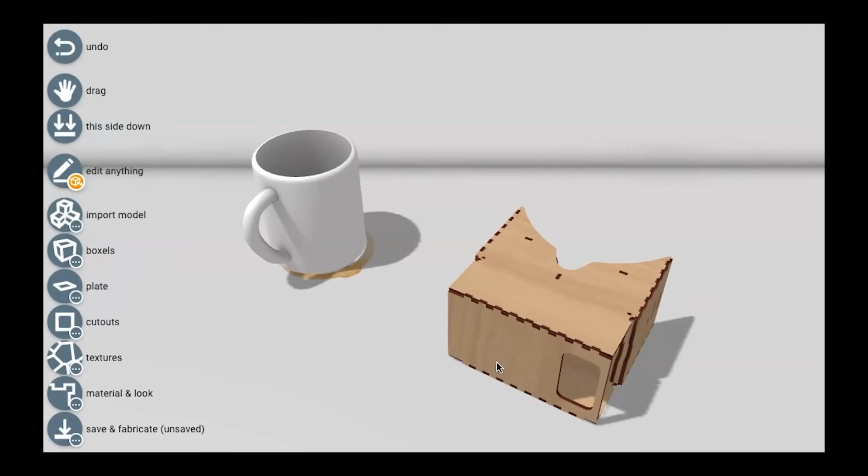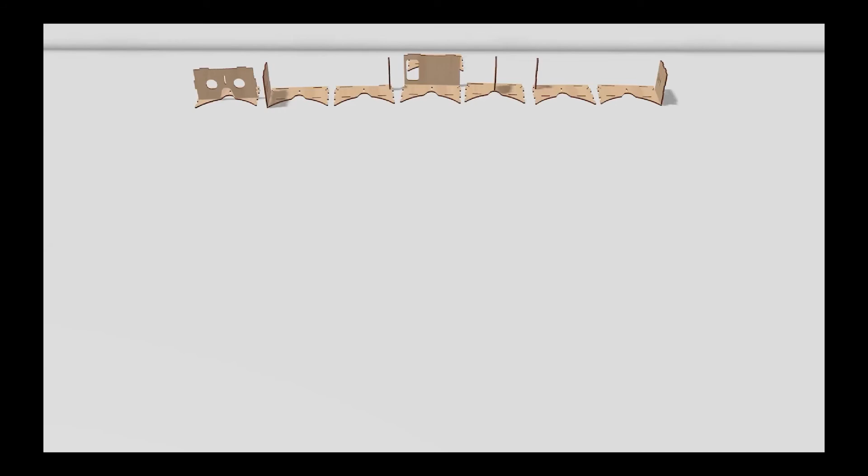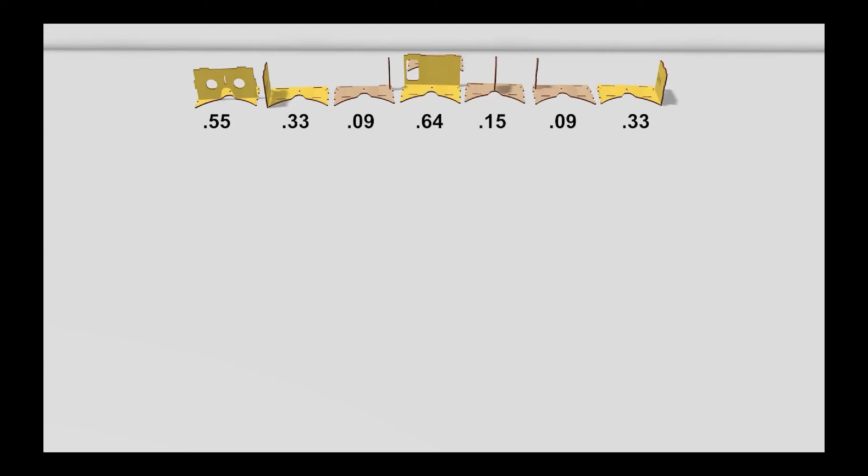So this is how the algorithm works in the background. It picks the plate with the most joints, and then it tries to connect all the other plates to that plate. It assesses those plates with a score, evaluating how close to a good assembly it looks according to the heuristics that we developed for this. And then we pick the 4 best candidates and continue to recursively iterate this, using this algorithm to find new assemblies.

You see that, in the end, after we do this a bunch of steps, we actually end up with that VR headset. And here's just a couple of other models that we end up assembling that way. So in a couple of seconds, typically less than 2 seconds, we end up with a model that you can then import into the editor right away, without even having to understand how this works in the backend.

And then you can make your parametric modifications to it. It's like a desktop organizer.

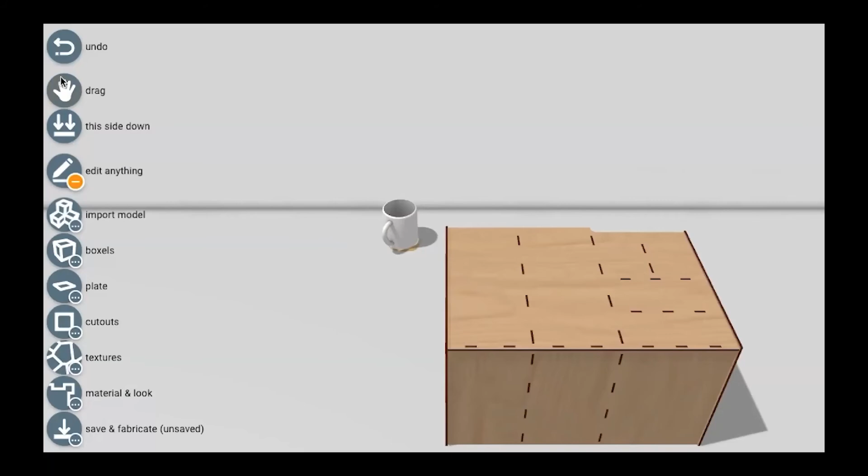So in conclusion, I've shown you 3 fundamental problems that currently exist in the 2D cutting plans that people are sharing in the laser cutting community. We identified these 3 problems and found solutions for each of them. And I've shown you how to tackle some of these issues by going towards a 3D format, transitioning away from a 2D format and using a 3D format to encapsulate the information.

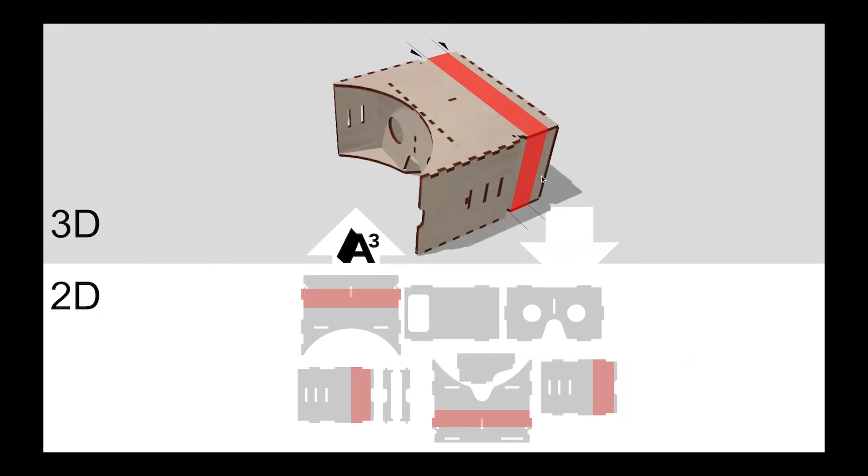And then we presented Assembler³ as a software tool that allows you to make that transition happen somehow. So I hope that solves portability in the context of laser cutting, which is the ability of models to be transferred from one machine or system to another.

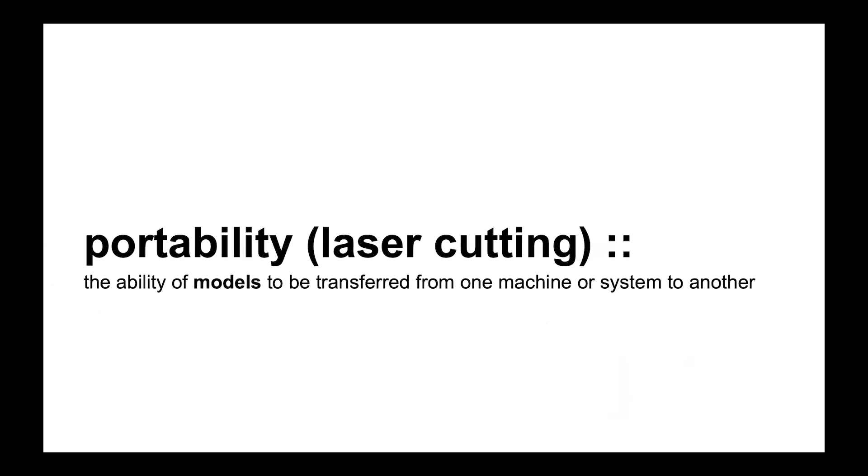And if any of the other fields of digital content that we've seen in the past are some sort of indicator, then this might be a moment where, after we actually achieve this milestone of portability in the context of laser cutting, we would have models that continue to be relevant, that continue to be useful for other users after they've been fabricated.

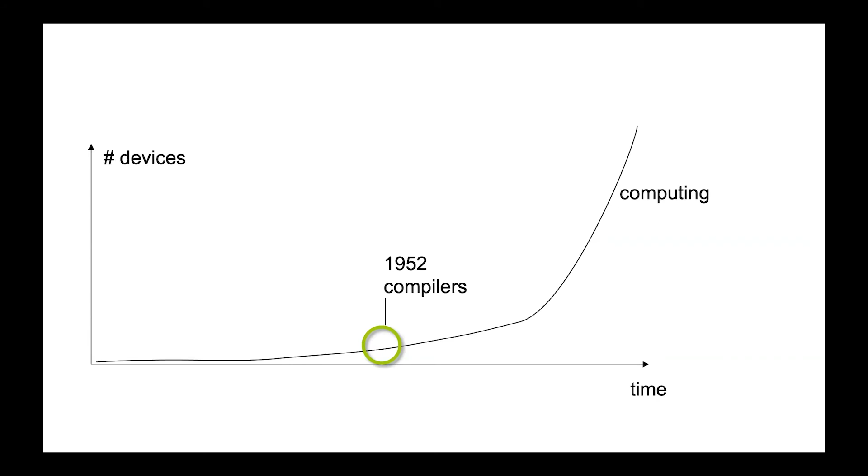So when I convince my students in Introduction to Programming that compilers were the main transition where we went from thousands of users to millions of users of computing, I hope that I have in this talk convinced you that the same step to transition from thousands of users of fabrication to millions of users is to abstract away from the hardware and, in this case, encode laser cut models in 3D.

And you know, then we can start dreaming about what the next big transition is, and maybe that is going to be mobile. But let's see, that's the next kind of thing that can happen after we figure out the portability transition towards billions of users. So on that note, I would like to thank you for your attention, and I look forward to a discussion with all of you.

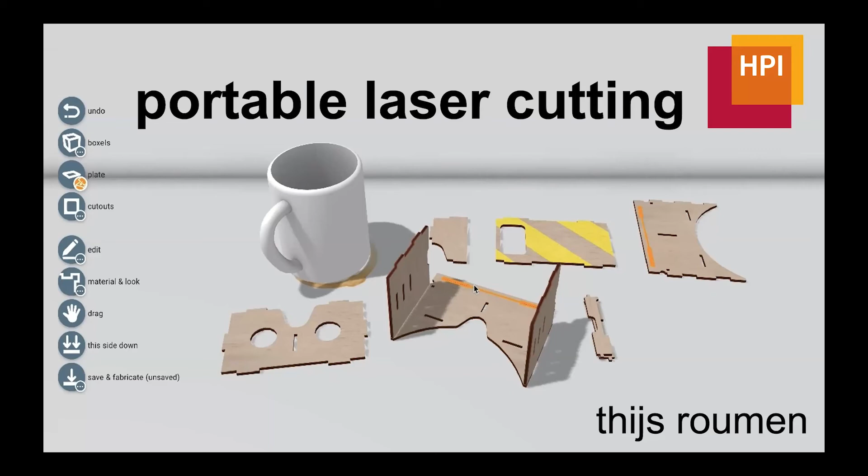Right. I really like your work. I mean, I'm in the same community, so I know many of your works already. I also like the way that you draw the analogies between what you're doing to, say, the 80s or 70s when the PDF became the standard, and the compilers, as you said, prompted thousands of millions of people

start to use the same things. I was wondering, so when you mention the PDF, one thing that comes to my mind is one of the reasons people want to use PDF or want to see digital information is because there's a strong need to read digital information on screens, right? And that will be more convenient. It will be easier for people to do text editing as well. So there's a strong need from the user side to do this.

What do you think would be the killer app? What do you think would be the strong need for the end users to want to do laser cutting at their homes to build all sorts of things? Because with the applications or examples you showed in the talk, you showed how people can do VR goggles or chairs or tables or microscopes, all sorts of things. But we sort of already have that existing in our environment, and we can just buy that from Amazon or shopping. So what do you think would be the strong need from the users' end, like why we want to scale up that?